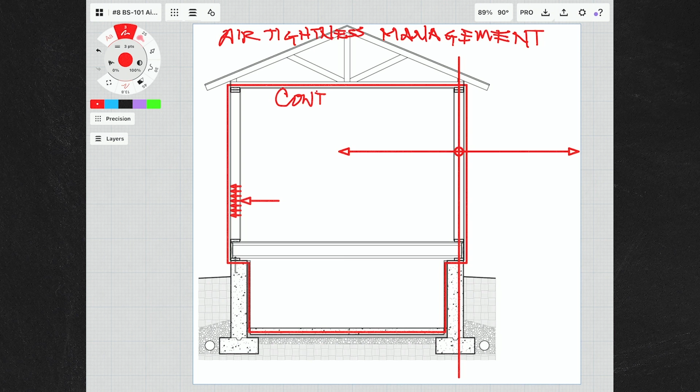Like we talked about in water management, I broke this one down into 3 very simple concepts. There's the concept of continuity. Write that up here. And basically, the concept of continuity is the key to airtightness management. Now, pay attention that we didn't call it air barrier, which a lot of people like to think about, because it's far more complex and a wider spectrum than just an air barrier. It's a whole management system when it comes to airtightness.

If I could make a quick point on that too, as we think about water management, water's honestly a little easier for us to think about. It's a little more visible, a little more tangible, right? Water falls from the sky, it rises from the ground. I can put it in my hand. I can touch it and feel it. Air's a little harder. I mean, we're swimming in a fishbowl of air right now.

And if you think about this studio that we're in, or the room that you're watching this, there's so many places for air to move in and out of that room, besides just your vent on the ceiling, or maybe a window that's not closed in the back wall. Yeah, it's a little bit more mysterious adversary than water. That's a great way to say it, a mysterious adversary. I like that. So continuity is the first concept.

The next one would be separation. And then lastly, the word I used is escalation. Continuity, separation, and escalation. Should we start at continuity? Yes, we're going to talk about continuity. Continuity is the key, right? It is the number 1 concept of airtightness.

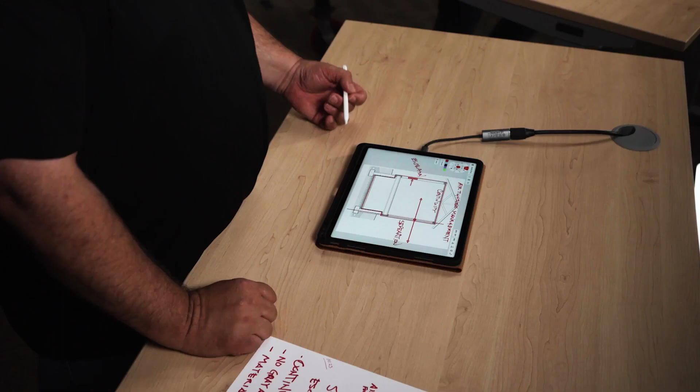That's for sure. So Joe had the red line test, right? And the red line test is very simple. He said you should put your pen down anywhere on a building section, and you should be able to trace around the building. And the most important thing is that red line test should close. It should be continuous, right? The same word as continuity, continuous. Exactly. You never pulled your pen up from the plans as you were drawing. It should be airtight.

Now, this is a funny one because I get into a lot of verbally aggressive discussions. It's a good way to say it. I like that. Because here it comes. Some people think buildings need to breathe. And we talked about it a little bit in our earlier series, but let's spend a minute here in case someone's watching this module first for whatever reason.

So my combative response is very simple, right? If you live in a very hot climate or a very cold climate, do you ever consider leaving your windows open an inch? All of them? If you live in Minneapolis and it's February, do you go around and open every window a half inch? Hell no. You close those puppies up, and on the bad windows, they're sealing plastic around the inside, right?

I grew up in a house with that. My dad would go to Kmart and get the shrink wrap film for our leaky windows on my 1950s house, and we'd wrap the inside, and then he'd take a hairdryer out and shrink wrap it. And that was an extra way to keep the wind from blowing through our single pane wood windows.

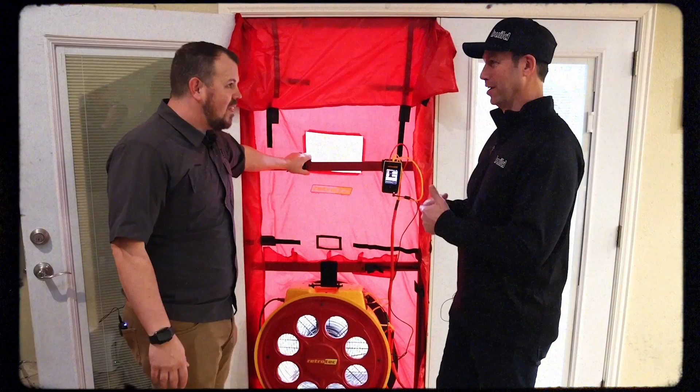There's this thing called the blower door test where we put a shroud on one of our open doors. We seal up everything. We put a fan in there. And then we measure the amount of air that we're running out of the house or pushing into the house. We can do a positive or a negative test, and we'll get into why we would want to do that. But we're measuring that flow across there at a certain pressure. For a residential blower door, we're typically at 50 pascals.

Joe taught me that a pascal is the amount of pressure that dropping a piece of paper exerts on a surface. Pretty low. So even 50 pascals isn't a whole lot of pressure. Not a lot of pressure. Right? But it's what we use as the standard for our test.

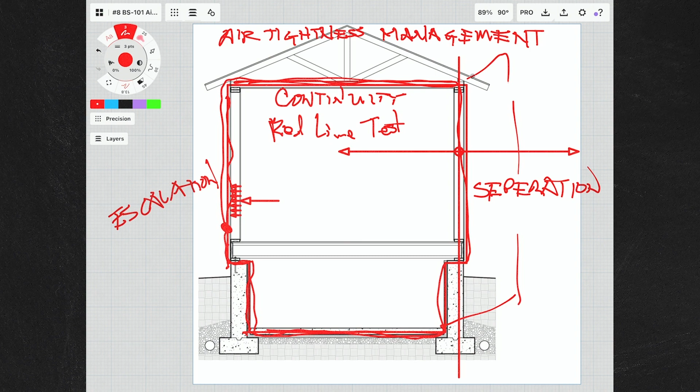But basically what you're looking for when you do the blower door test is a number that symbolizes the amount of air leakage over the total surface area of the building. Now, when I talk about total surface area of the building, understand that is ceiling or roof, it is all of our walls, including the foundation wall, and it's the bottom. So it is all 6 sides of the box.

Yeah, and if I could extrapolate on that, we often refer to that as the conditioned space of the house. That's the envelope for the house, and that's the envelope that you're going to live in. We're going to get into that when we talk about separation. So the red line test is basically our management system to battle the blower door.

Right? And actually, let me interrupt you for one quick second. The blower door test is not just a measure of how well we did in the house, but also in most places where you're watching this, it's now part of the building codes. So depending on when you're watching this and where you live, there's going to be a score on that blower door test that you need to actually make. And this is coming to pretty much everywhere in North America, at least.

If it's not already a requirement by code, it is where Steve builds and where I build. It may not be in a few places, but it's coming very, very soon. So this blower door isn't just theory. This is practice, and this is you being able to get a certificate of occupancy from your jurisdiction where you build as well. Yeah. Now, 2 things about the blower door test. One, that you mentioned, it's becoming more prevalent and becoming a requirement in certain locations.

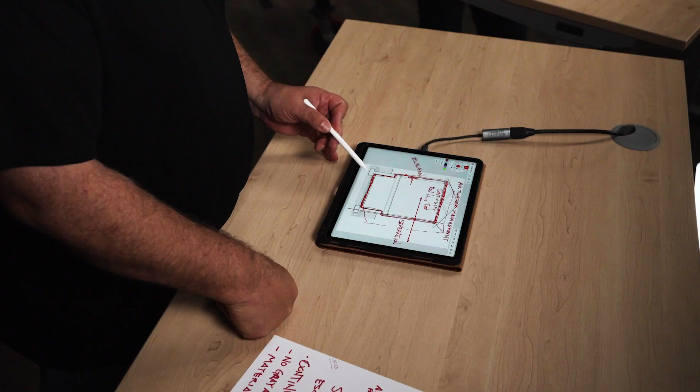But I like to take it one step further, because when we build a house, we don't just build a slab, a foundation wall, an exterior wall, and then put a roof on it. That's right. We put windows in, we put doors in, we run electric wires through the wall, we run plumbing through the wall, we run HVAC lines through the wall. Yep. And it seems like we have more penetrations through our air barrier system than ever before. That's right. We have tons of stuff going through there. For sure. So when I do a blower door on some, it's selective, because it can get costly, and we don't need to do it on every one.

I do multiple blower door tests because I like to see what components of the building are contributing to my air tightness, right? So we did a house years ago. Zip was one of the first products. It was the first time it was on the market. And so we built the box. I used it as my primary air barrier.

We didn't get the windows delivered. They were delayed. So I coaxed the builder into, let's just build a big green box. And we put the drywall in on the second floor lid after we put the roof on, and it was a slab on grade house. So it was basically just a green box. And then we tested it.

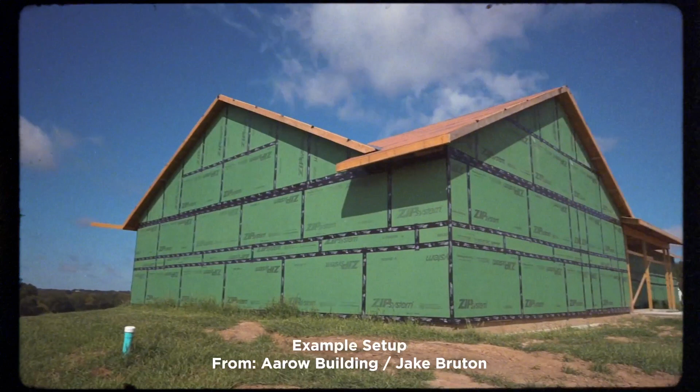So concrete slab on grade, kind of like my tabletop, walls. And then the framed roof had the air barrier at the top with drywall. So we had our continuous air barrier, no punctures, no penetrations, no windows or doors, just the one door opening where we had the blower door test. And it performed amazingly well.

Super tight. And I used to tease the gentleman at that company because it's like, I've already done a full-scale model test of your product that you guys haven't. But understanding how things work as an architect, I found it very important to me. People say, well, I build a really tight house. Well, how do you know?

And I could sit there and say, well, I build a really tight house, but how do I know what's contributing to the air leakage I am getting? Where do I need to target my efforts as an architect and have my builder target his efforts as a builder to really get as tight as we possibly can? Yeah, that's for sure.

And the thing about air tightness that some people don't realize, it's not necessarily a myth buster, but let's just say it's a knowledge evolution. Years ago, when we talked about energy efficiency, it's real easy. If somebody says I build a really good house, I'm like, how do you know? Well, we build R38 walls, we do an R60 ceiling, we use R5 windows, we do R10 under the slab.

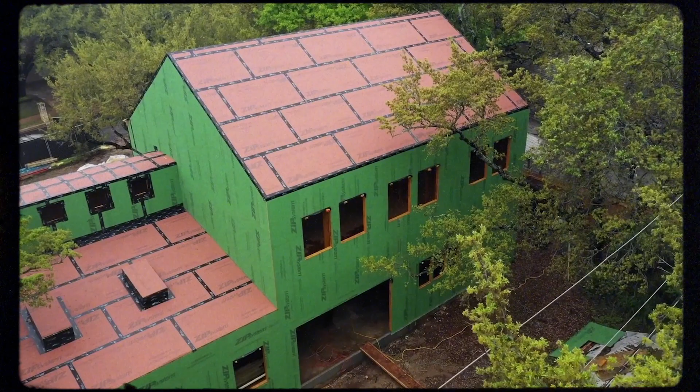Now, one of the other interesting parts of this to me that I get questioned on quite often is, Steve, what's the best air barrier? Right? What's the best component that I should use in my buildings? And in words that Peter Yost loves to use as a building scientist, he says, well, it depends. Why does it depend? Well, just look at this simple drawing, and this isn't even a complex one.

We have concrete slab, concrete wall, we have band joist, we have above grade wall, and we have a ceiling assembly. Right there, we have 1, 2, 3, 4, 5 different components that make up our air barrier system or our air management system, right? Now, if I take that and I add a window, or I add a door, right? Or I add penetrations. Hose bibs, HVAC wires, exterior outlets, right?

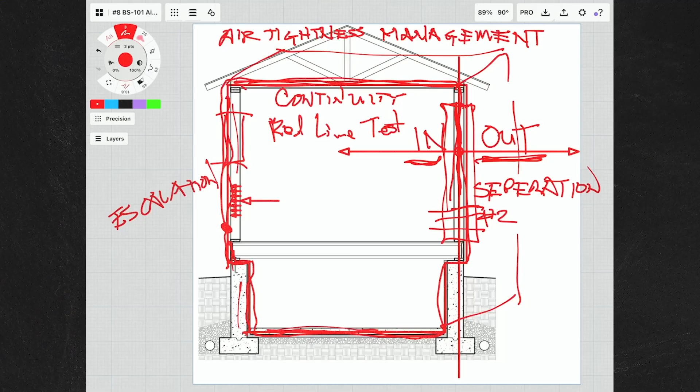All of those things have different systems that then get incorporated that bridge from what I call my primary air barrier system to those secondary components like a window. Yep. Put the window in a rough opening. Well, there's something across that rough opening that has to maintain, you guessed it, continuity. Continuity. That's right. Right? Because continuity is the key.

And so there is no, just use this or just use that, because the field of those components is not nearly as important as when two components come together and you have to bridge that air barrier from this material to that material. Yeah. Right? That becomes the huge challenge in air tightness.

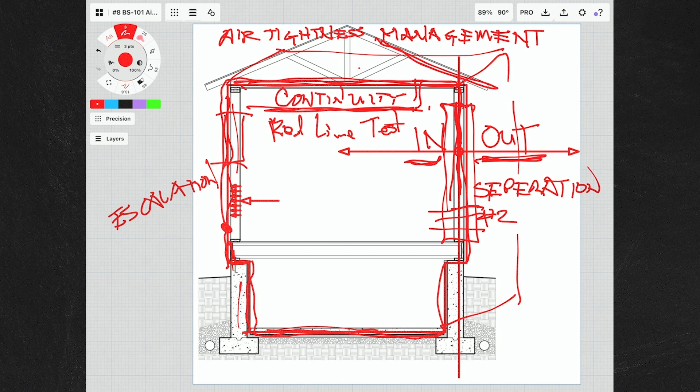And on your drawing set right there, where the top of the first floor ceiling is the continuity of the air barrier, that means that that attic space above that is outside. Yes. Right? Yes. Even though you see it as, hey, Steve, isn't the attic inside? Well, it's under the roof. No, it's not. It is outside of my red line, unless I choose to incorporate components of the roof as part of my red line test. Then I could make a conditioned attic.

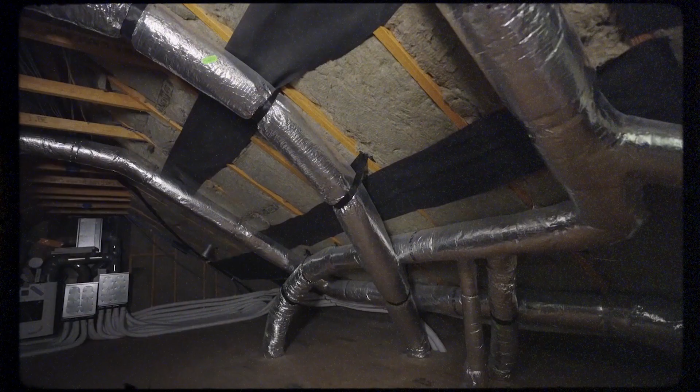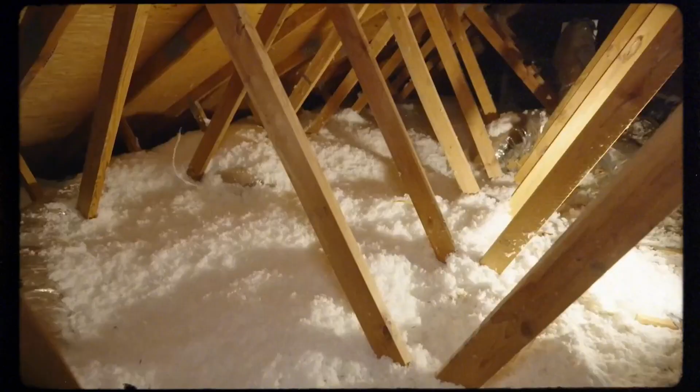Yeah. Now, these are the decisions that we make along the design process, right? So just like we asked when we were talking about water management, if you're the client, you should be asking your builder and your architect, what is their air tightness strategy, right? Is my attic a conditioned attic or an unconditioned attic? Is it outside or inside? And they better have an answer, right?

Because if you go back to the first one and my favorite word, this is the whole reason we're building. Control. How can I possibly gain control if I don't know what I'm trying to control? That's right. Right? If I can't define whether my attic is outside or inside, then don't even come to me thinking about control. That's right. Because you don't even know what the hell you want to control.

That's right. And as a further note on that, if your attic is outside, meaning the ceiling is your air barrier, where I am in Texas, we see a lot of mechanical equipment up in attics, which are outside, meaning it's a vented attic. You see these air vents. It's a pretty hot space. There's insulation on the floor of the attic, and the drywall is the air barrier.

Well, now to Steve's point, that red line's not continuous anymore because now all of a sudden I've got HVAC equipment, I've got ducts, I've got all these different penetrations in that air barrier. And so if you watch a lot of my videos, I talk a lot about conditioned attic spaces in my houses because I don't have basements in Texas. We have a lot of rock. We have a lot of other reasons not to need it, like no frost line here.

But in the north where we build, we often have, like this picture shows, a basement where you see mechanical systems. You see water heaters, you see the furnaces, the air conditioning system, ductwork down there.

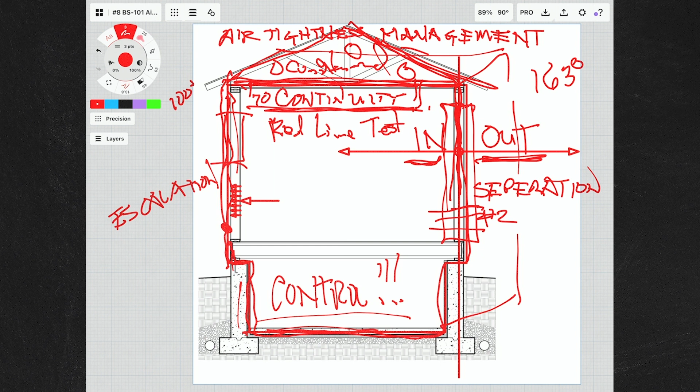But my point is, you're building your dream house here, my friend. You're going to buy energy. Remember when we talked about energy efficiency? We're going to buy that purchased energy. I'm going to run it through an air handler, and I'm going to chill it. I'm going to cool that air down. If I'm trying to deliver it to a room at, let's say, 70 degrees, 68 degrees, I'm sending it down the line, let's just say at 60 degrees. I'm going to use real simple numbers. 60 degrees, and I'm expecting my house to perform well. Okay? I told you to sit down.

Think of the math here. That air is going down a duct at 60 degrees. It's 163 degrees in that attic. It's not just outside, it's actually worse than outside. So this is the part where I pushed the conversation. I looked at the builder and I said, not only is putting your ductwork in the attic in Texas just a dumb idea, you should have run the ductwork on the outside of your roof. It would have been more energy efficient. That's true. By 60 degrees. I would have knocked the delta down to 40 degrees from 100 degrees.

Right? It's what baffles me about building science. And it's really the whole reason that Matt and I are doing this: when you step outside of building and you look in and give a quick analysis of what we're doing, we just realize how some ideas are really dumb ideas. Yeah, I mean, this is just basic high school physics, right? Moisture moves from more to less, heat moves from more to less. And should we put our ductwork into the hottest space in the house when we're trying to cool our house? It just doesn't make sense.

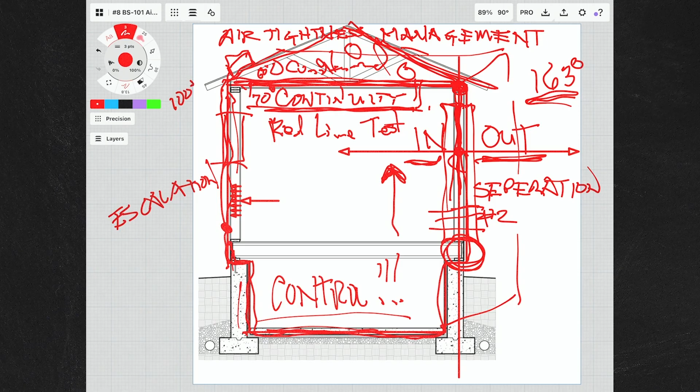All right. Last note on separation, and you touched upon it. There are pressures happening at the top plate and pressures happening down here that are different than pressures happening in the middle of the wall. Down here, typically, the air is rising due to the temperature. It's always hotter up here than it is on a floor in any house. So what that does is it basically creates a negative pressure. The house is sucking on the lower transition points. Is that considered the stack effect? Yes, the stack effect is this piece here.

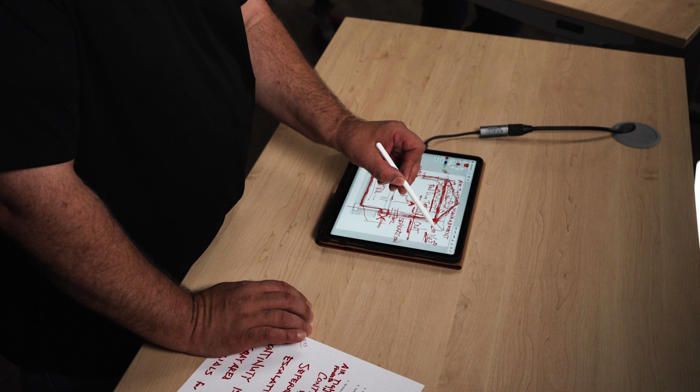But that air at the top is trying to go out because that ceiling area is being pressurized due to the stack effect. So if you were to graph that, it looks like this. And actually, I'll switch colors here. It looks like this. So this is air trying to get out. This is air trying to get in.

So what's interesting is in the middle field of the wall, there's not a whole lot happening in terms of air tightness, pressure, and air leakage due to pressure, right? So somewhere in there is what we would call the neutral pressure plane. And the neutral pressure plane is where that negative pressure and that positive pressure equalize, right? Or are neutral. They cancel each other out.

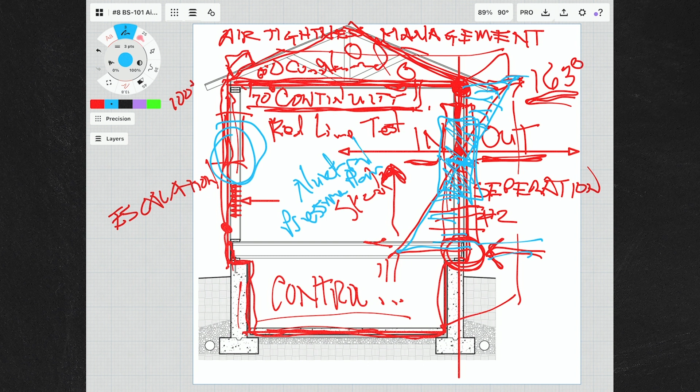Yep. So what does that mean if I'm a builder or if I'm an architect? Well, while these details are important here, the ones that are more important are these and those. That's a very great point. Because that's where that challenge, that Mother Nature's challenge, is happening. They're going to experience the most escalation, right? Which is your concept 3 of the air tightness. Yes, that brings us right into escalation. So these details are escalating more than that detail.

But the basic premise of escalation is the minute I introduce an airstream to a building, well, things can jump on that airstream. And this is why air tightness and water management are linked as control layers, right? Joe had that really cool image that I know you've seen. It's a piece of drywall, right? And he has a 1-inch square hole in it.

And it's something like, diffusion, moisture migrating through a material, it might be 1 cup of water. You cut a hole 1-inch square, and it's an order of magnitude. You get 100 cups of water that can move through that 1-inch square. Because of the air. It gets on the air train, right? So that moisture jumps on the air train.

Now, if I'm in Minnesota, somewhere out here, let me switch colors here. Somewhere out here, I might find a cold surface. What happens with nice, warm, moist air hitting a cold surface? Changes to water. And guess what? Our air tightness neglect has now become a water management problem. All right, the backside of that sheathing. The backside of the sheathing is raining.

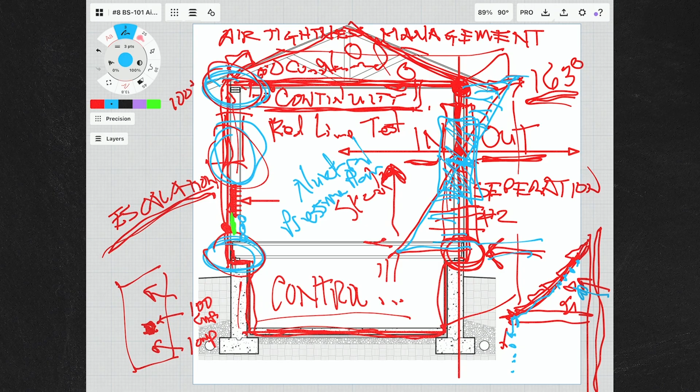And guess what? Because it's sloping, that water runs right down here. It finds cracks. It comes out here and it drips off of the fascia. But when it does it, it leaves that residue on that fascia board and it creates those tiger stripes. Yeah. And this isn't a problem with the fact that they use slate. This is a whole series of little things that air leakage through here had the ability to escalate due to all these other parts of that assembly.

So good, Steve. There really is no gray area, is there? There is no gray area. Remember, I'm going to show you again because I can't tell you how many times I go out to the building and I can ask a builder. And if you're a homeowner, walk around your building.

If you question it, if you cannot answer as a homeowner when you're standing somewhere in your house, am I inside or outside? Call your architect, call your builder, set up a meeting and say, hey, I'm standing here. Would you both say I'm inside the building or outside the building? Because I'm either inside or I'm outside. There's no gray area. Yeah, that's right. It is that simple. Remember, it's not rocket science, it's buildings.

I'm going to make one last point, even though I know we should be finished. But in his example here with that attic, that means that attic needs vented. If that was a front porch, if that was a soffit area that was beyond the air barrier, we'd also want to vent those spaces. Because if we did have any moisture buildup, we'd want that moisture to dry out. And this is a building code issue, and this isn't really a building code series, but any space that's outside needs to be vented.